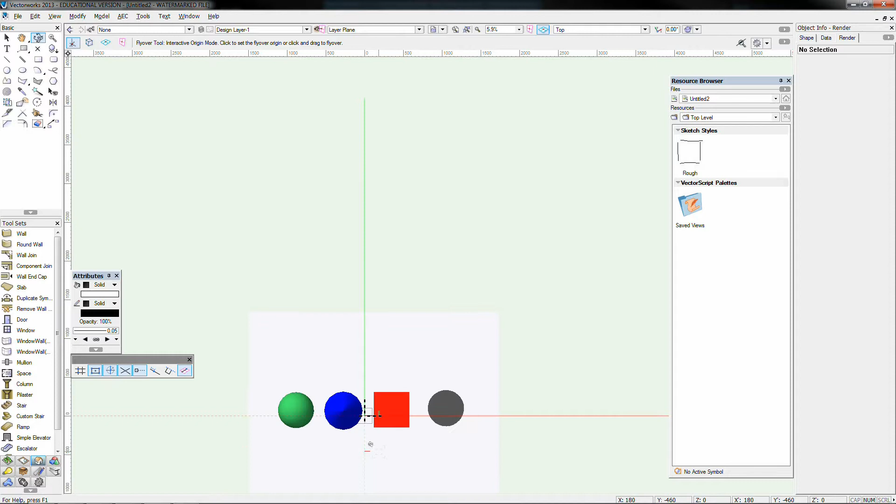But as you can see here, I can fully move around these objects in 3D, no worries, and jumping between views as well. So I'm going to jump back here to my saved view that I've made. We're going to talk about those in a moment when we talk about taking snapshots.

So jumping back down here from the view menu, rendering, and I'm just going to open the OpenGL options here to show you can increase the detail, you can use textures, edges, shadows, all of that. So just have a play with those tick boxes there if you are requiring something for a presentation mode using OpenGL.

Now, that there is the cutoff point down to here where the basic package of Vectorworks stops. So normally in basic Vectorworks you'll have your wireframe. I don't know if you have Sketch, I'm pretty sure you do. You'll have OpenGL, and then it'll jump over this section here. You'll get to your hidden line and dashed line, I believe, and then your polygon shadings down the bottom.

This section in the middle, though, comes with the Renderworks package. So that's the new 4D Renderworks package that's included with 2013 if you want it to be. In 2011 and I think 2012 you're still using the old one, which is my preference, strangely enough, but we're going to go ahead with this one here.

So Fast Renderworks is kind of a nicer looking version of the OpenGL, and then you can step it up another space right here to go to the final quality mode, which makes everything look very slick. You will have shadows if you have lighting incorporated, but you can just have a look, for example, on this sphere, how nice the edges are, how smooth it is. You can see as I zoom in it has to increase the quality for the DPI of my page, but you can just see it's got some really nice effects happening on there.

The cone not so much, but the reasoning for that is the way that this is currently drawn and the amount of divisions that it's got going on there. So I'm going to zoom back out again as my computer thinks about doing that. There we go, back out here to my saved view.

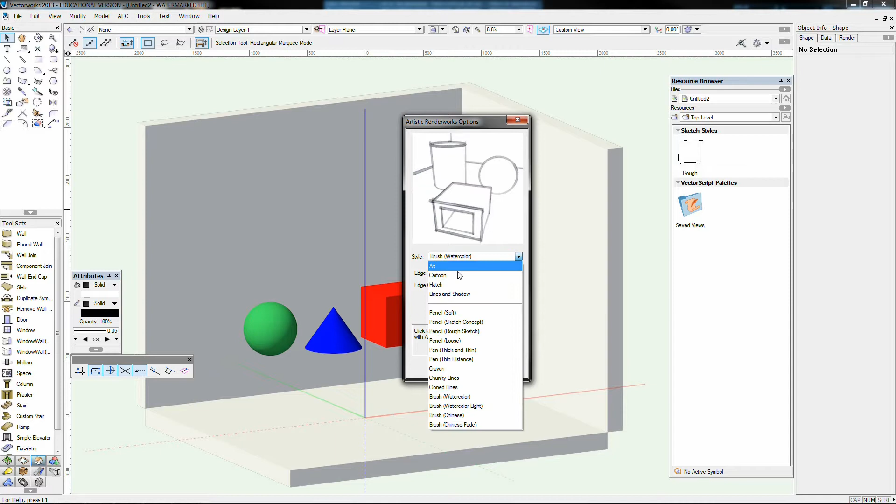These artistic Renderworks options mainly affect your pen styling and the edges of objects. There are a few that affect the actual surface and textures as well. I think Cartoon incorporates textures and makes them look slightly different. So we're going to try out, let's start off with Cartoon.

That looks pretty good, just as a couple of examples, obviously you can play with these in your own time. It'll take a moment to re-render once I've selected that from the rendering menu up here. So, no, sorry, not custom.

On to the next one, Artistic Renderworks. Here we go. Now what you can see here is that it's actually converted my drawing into its interpretation of a cartoon, which is kind of nice, pale colours, no shading, the walls have been simplified, it's dropped a few lines where it thought was necessary, and it actually looks really good.

So when you start to develop your skills in Vectorworks, you'll know when it's appropriate to use these and when it's not. For example, for some of the technical drawings I do, I just use the pencil soft and the pen thick and thin to really represent my objects as though they've been freehand drawn. And when you print it out on an A4 page, people can sometimes sit there and go, did you actually draw this, or is it printed out?

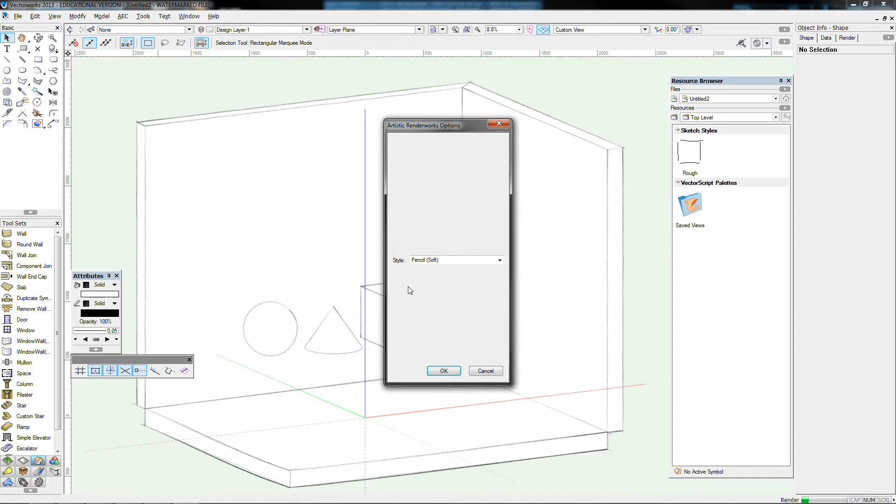You'll notice things like it enhances the end lines of stuff, as if you've drawn slight overshoot or extension lines on bits and pieces. The lines are slightly wobbly, all that kind of stuff going on. And inside these options for these various styles, you'll get a variance of change as well, so for example a thickness and an edge color. There's also a few that have more variation than that.

So here's the pen thick and thin. You can see once again, it's as though I've sketched it with a pen. It's actually adapting here, it's got thick and thin pen styles going on. Hasn't fully rendered because I accidentally stopped that, but that's okay. You do get the idea, hopefully, from that where you can head.

I recommend that once you've mastered your Vectorworks skills up until this point, you've got something that's presentable, and you want to present it in a different way than standard, have a look at the Artistic Renderworks options in there.

Hidden line and dashed line. Now these are probably my most commonly used, in particular when I'm doing detailed drawings of set items, for example cutaways of different pieces of set that I really want to show the framework or the details behind.

So hidden line, and you'll notice I'll click it here. It's very straightforward. It will simply show the lines of anything that's at the forward of the image that you'd normally see, and it won't show the back lines. So for example this box here we know has a line that runs down here, and we know it has two extension lines that run out this way. If I click on it, you'll see those hidden away there.

So hidden line basically sketches it in a style that just simply represents the wireframe view without the background drawing technique going on. Just as an example, this is the standard hidden view here, and this is the wireframe, so it's just hiding all of this excess stuff hidden behind.

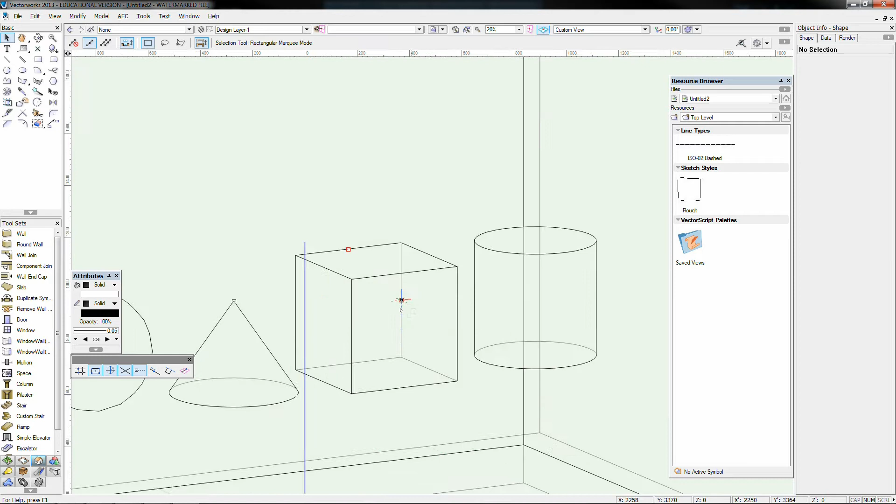Now there is another one here, and this is another one of my favorites, which is the dashed hidden line option. What this does is it applies the same hidden line technique to everything shown in front of you, but on a better shown scale than this. All of the other lines have dashes through them. You can see it here as I zoom out.

This is more evident when you actually take this across into a viewport, as you're meant to do, and then put it onto a sheet layer. So that's what that is for, and we'll try and do an example of that later on when I do a cutaway into my friend's household.

Jumping back down here to the rendering menu, we've got the shaded options now for polygons. So we've got unshaded polygon, shaded no lines polygon, and final shaded polygon, and they're all very straightforward. Their title kind of tells you what they are.

So unshaded polygon renders these in 3D, but doesn't give any shading to the polygon, just shows them as they are straight out with their mapping. You can see here it's given this a planar mapping on top of here.

With the surface represented as a polygon map, moving straight ahead. Shaded polygon takes this a step further, keeping that same mapping but giving it a slight shading, as if there was some sort of omni light directed upon this.

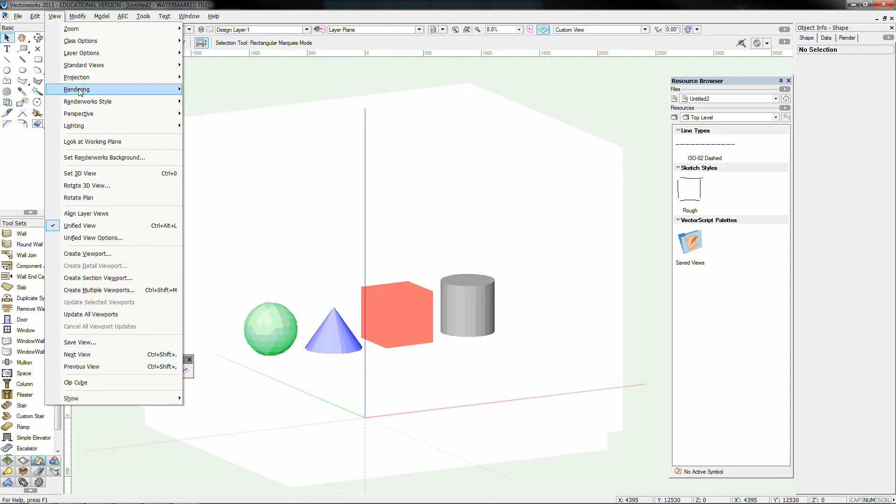As you'd guess from the rendering menu, shaded polygon no lines takes away those lines, just giving it out as a polygon map with the shading options present. Rendering again, final shaded polygon is a step up from there, giving it enhancement with lines, slightly upping the textures and rendering capabilities, but we're still seeing it as a polygon breakdown.

The difference with this over some of the other rendering modes is it will be quicker because it's rendering as polygons, a simpler form of each object, but you won't get the smoothness, so it's something you have to toss up between. It's a personal choice in how you want to represent your objects.

Down the bottom, you've got batch render jobs and starting your renders. We'll get into this particularly when we talk about doing multiple different styles and big batch jobs with your final quality Renderworks, and it's where this saved view option comes into play.

Up here from this little tiny box, it's got saved views. It's got a drop down menu, and normally it'll just have these two, save view and edit view, and then it'll have your views listed underneath. I've got 'untitled view,' which is probably a mistake by me.

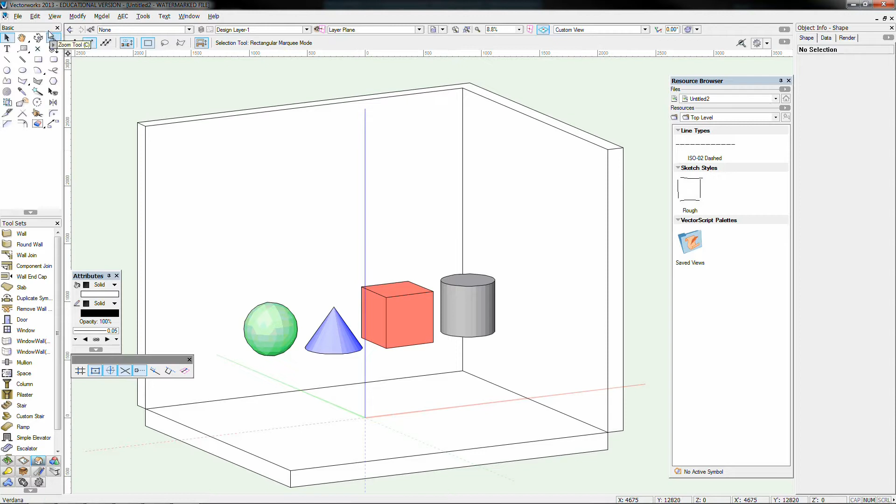What I'm going to do is change this up a bit. I'll go to rendering and make this final quality Renderworks. There we go, and I'm going to rotate this to a top-down kind of view in isometric mode still, and show you the save view. I like this view, that's a great view. Click save view, and you get some options here, so I'm going to call this 'top down isometric.'

You get some options here: do you want to save the orientation, the zoom, the page location, the unified view - meaning do you want all layers unified in the same location, or split out separately - and your render mode and options.

In this case I'm going to tick this box, which means that when I come back to this view I want it to render out in the style I currently have selected. Do you want to save the visibility? Most probably you do - you can alter the layer options. And do you want to save the class visibility, meaning do you want everything you're seeing now to stay the same? If you've got all these checkboxes done, it's going to be the same when I come back to it.

So I'm going to hit OK on that. I'm also going to rotate back down to a slightly underneath view, and change the rendering style - I might make this our artistic Renderworks, a sketch style of some variety. I'm going to save that view as well, calling it 'lower isometric (sketch),' and save all these things again.

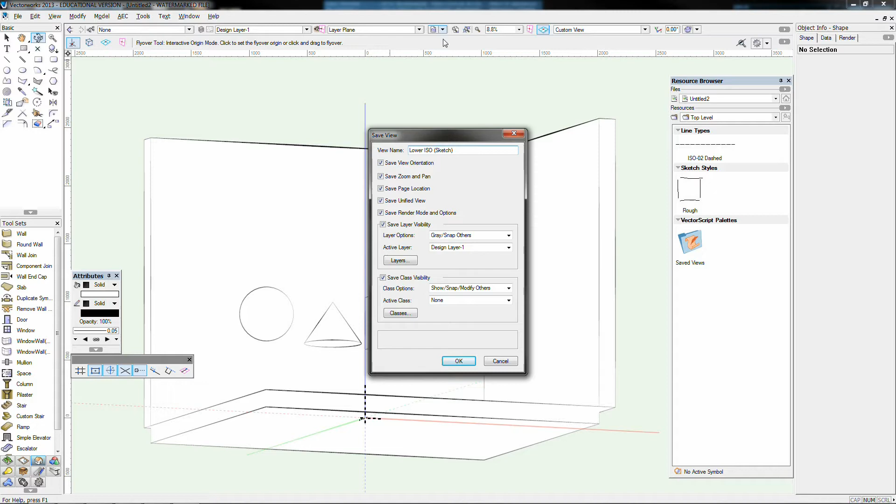Now what this allows you to do is, if you move around your drawing and go 'oh yeah, I need to look at that from a different view,' and then suddenly think 'oh, I really liked the perspective I had and I can't get back to it' - all you do is drop this down here, select my lower ISO sketch, and it takes you back to seeing that as you wanted it, and you can drop this down again.

I think that top down view is really good, and there it is again. So it's a really good way if you've got a client in front of you, and you go 'now these are some examples of what you might see around the site, this is what you might see inside your building, this is the view from the bathroom, the kitchen, etc' - and set up a whole heap of these things. You can not only get them there, but print them out from the view up here.

From my rendering menu here, I'm going to go down and create a batch render job. Now what this does, and it's really for if you're doing high resolution images that are going to take a couple of hours to render out, for example.

Some people get up to that stage. For example, the Shrek movies, this is a bit of trivia for you, but the Shrek movies actually took 2.5 years to render. They literally sat back and went, cool guys, see you in 2.5 years, just let this computer do its job.

So when you get up to these stages, I've had high resolution images that I've done that take 15-20 minutes just to render a single final quality view.

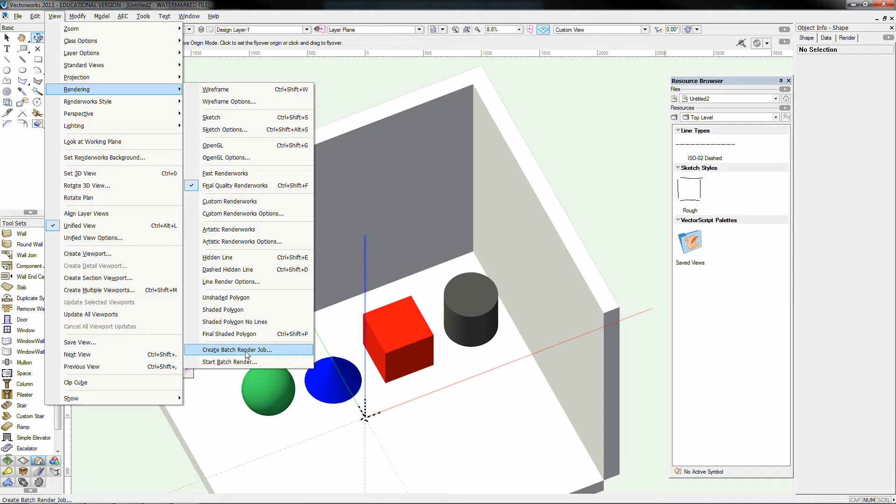So what you do instead is you go to a view, and I'm going to do it here, for example, in wireframe. This could be a whole series of views that you've got from your saved views. I'll go to this one here, and you go, okay, I want this rendered out. Rendering, create batch render job. It asks what you want to call this. I've already got one saved, but I'm going to call this ISO-01.

Super. And it asks what the render mode is, and you go, well, I'd like it to be either a Renderworks style of all these different styles, which we haven't got to yet, but we will. You've also got your final quality, your custom Renderworks, and your artistic Renderworks. So I go, okay, I'd like final quality Renderworks, please.

It goes and sets the export image options, because it's eventually going to become an image. You say, I want all visible objects, or I want the current view, so I want current view, for example, what I'm seeing right now.

The memory required for this is greater than 500 meg because it's quite an advanced thing. Do you want to proceed? Yes. Is that because it's such a large file? Wow, that's massive. That is massive.

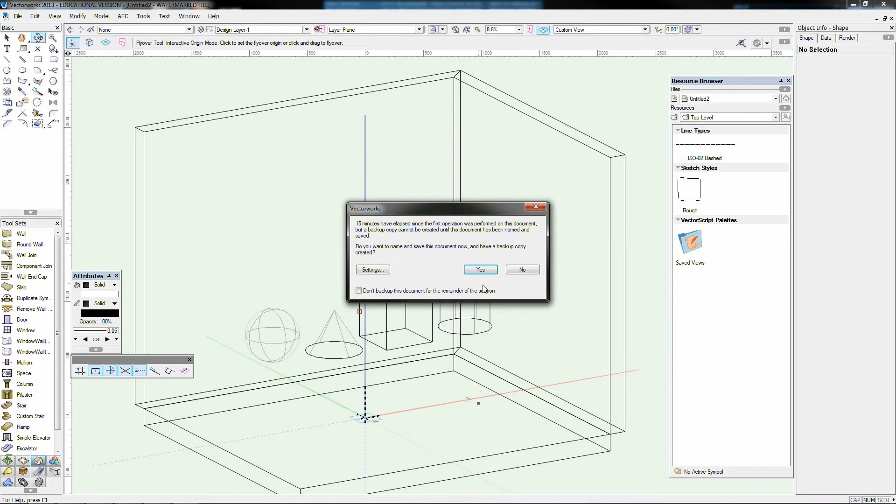I'm going to swap that down. Let's do a 1920. Oh, close enough to 1080, whatever. So I'm going to click save on that one, and then hit OK. It gives me a message saying I've been 15 minutes or more doing this, so that's fine.

So what you do then, when you want to start your render, is you go down to rendering, you go start batch render job, which I've misclicked there, and you've got your available jobs sitting here. It's like keeping a queue in mind, and you can choose all of the chosen jobs. You choose a folder to put it in, so it can put it under my name, or I can choose a different folder, and you click start.

What it will do is then just think about it, and do it in the background. While it's working away, you can go check your email, go make a coffee, go have a snooze for a couple of hours, and come back, and all of your particular jobs that you've chosen to be done will be finished.

That's what that's for, and once again the easiest thing to do is just jump around in your saved views there: create batch, create batch, create batch. Once you've got a whole series of stills that you're happy with, you set it to go overnight, come back in the morning and surprise, you've got all your drawings done. So that's the rendering stuff going on there.

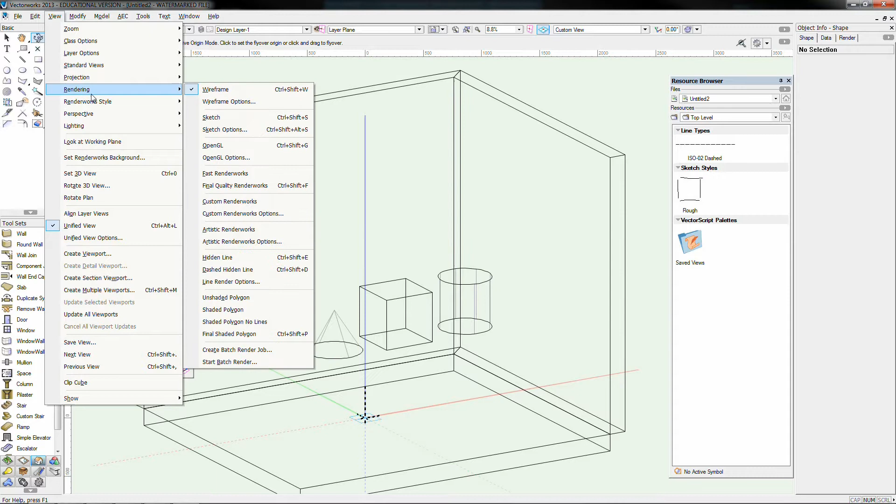We have got the Renderworks styles, and they're very much just like these rendering options here, except styles come with a slightly different tint to them. For example, they're mainly artistic. You have got realistic down here as well, which you get into once you put a skyline in, and once you've done your lighting options. Once you've put all your textures on, you can do all of these.

So I'm just going to have a go here. I haven't particularly played with these much, but the artistic shadow blue, that sounds pretty interesting. That's very pretty. Look at that. That's excellent.

And we've also got, where are we? Yeah, we'll try one of the OzCAD ones, which come with my Australian version, I believe. If OzCAD want to correct me on that, I don't think they're international, but we'll try Sun Study with grey shadows.

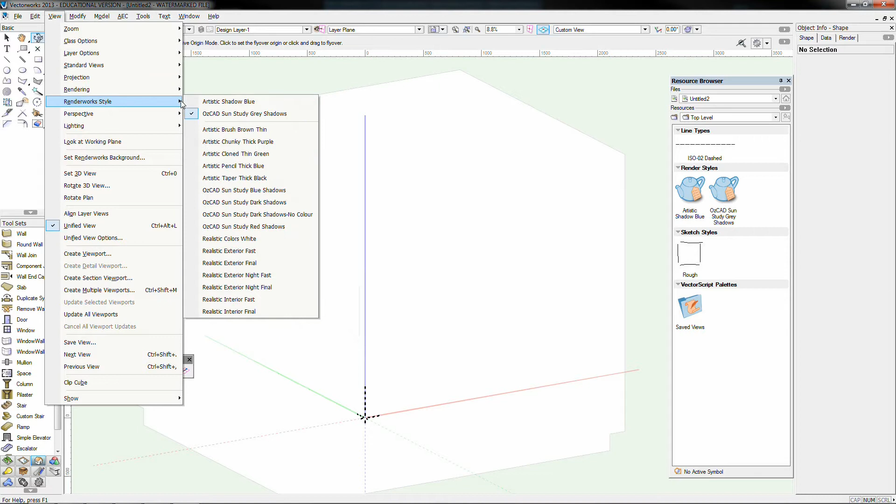Completely obliterates my object because it's not sealed inside. I presume if you were doing an interior drawing, that would be slightly more interesting. And we'll just try one more here from the lower realistic side, we'll try an interior fast on that.

And there we go, it's having a go at doing that. You can see that's the new 4D render engine going there, and that's what we've ended up with. I'm not sure why my walls are white. It looks like it's done a physical sky interior background, because it's not sealed as an interior, it's taken most of the blue surrounding this object. As you can see, I've got a sky rendering in the background, and it's putting that onto our objects.

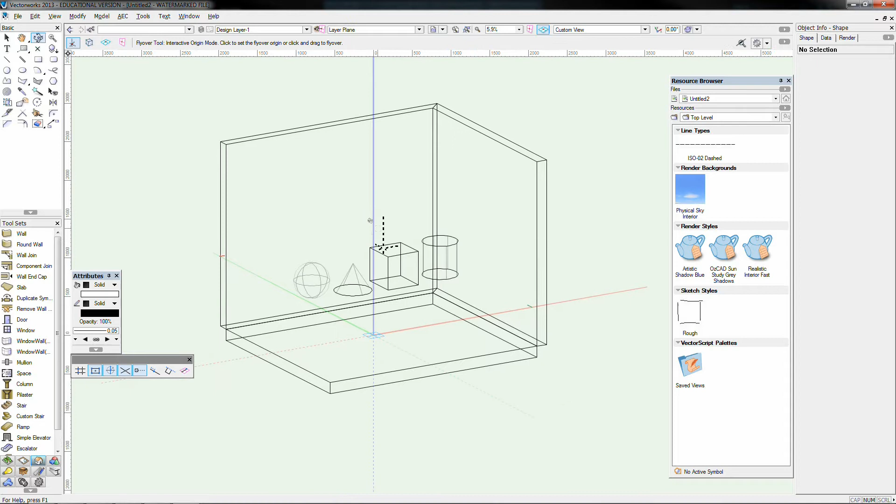But we'll get into a lot more of that later on when we have a look at our apartment. So, where do we move from here? Very good question. Jumping back into a wireframe so my entire drawing isn't taken up in rendering power, and we're going to talk about textures.

From over here in my resource browser, if you don't have it open yet, from the windows up here you can choose palettes and resource browser. Click that, you've got a checkbox, and you'll have this little thing. Sometimes it sits collapsed - there it is - and then you can just click this little pin, it'll pop back out and stay in place. We've got quite a few things that have popped into here as we've been doing our different render styles, just in case we want to drop them on, but I don't want to.

What I want to do is right click in this and go new resource in Untitled 2, which is my current document name - great name for this document - and you'll see there's a couple options here. I want a Renderworks texture.

Notably here, this is the point - if you don't have Renderworks, you kind of have to stop, because you can't do any more than this. You can play with your colours, you can do your sketch options, you can have a play with that. Don't stop watching the episode, obviously, it's quite interesting from here on in, but most of your rendering capabilities won't be there, just throwing that out there.

So, Renderworks texture, click on this, and here we go. We've got a couple of options: a texture name, and some shader options. They come in 4 categories: colour, reflectivity, transparency, and bump. Let's run through what each of those mean.

So name - what am I going to call this? I'm going to call this test 01. Sounds like a great name to me. So colour - colour is the base modifier. Colour is basically what does it look like underneath everything else. If you strip it back to its bare bones, what does it look like? And you've got some options under here.

You can take an image. Now, image means I'm going to take something and tessellate it. This is good for wood floorings, it's good for tiles, it's good for if you want to map a wallpaper to a wall - that's what you want to do. Something that looks like something in the physical real world that you're going to map to this thing. And that's probably, at a guess, 50% of most of your textures. The other common option, and that's normally if you're going to do a high resolution, of course you're going to take mostly real world images.

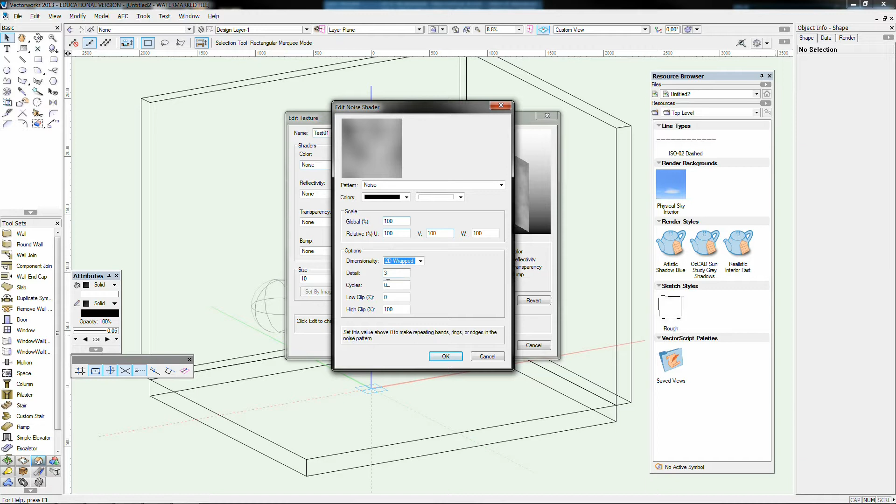Cool. Anyway, back on our standard noise, variance between colours, some scaling options, relative mapping in 3 directions there, and dimensionality, 2D and 3D solid. Choose whether it's wrapped like a pattern or a 3D solid. Interesting, and some different options here that I've never played with, but you can go and have a play with those if you like.

Pavement, once again, here we go. If you're doing an outside exterior view of some sort, you're probably going to need pavement tiling at some point in time. It is a random pattern scaling there. You've got the stone colour, the gap colour, and the smudge colour, which I believe is the smudge across some of these. Hit OK on that.

And we've got tiling as well, which is a more symmetrical pattern, much like the brickwork. It's normally 2 or 3 tone. You've got some different patterns here, so we've got brick patterning, circular patterning, radial lines, for example, if you want to trip out and have a dance party. We've got some spiraling, and everything else is here, there's a lot of different patterns.

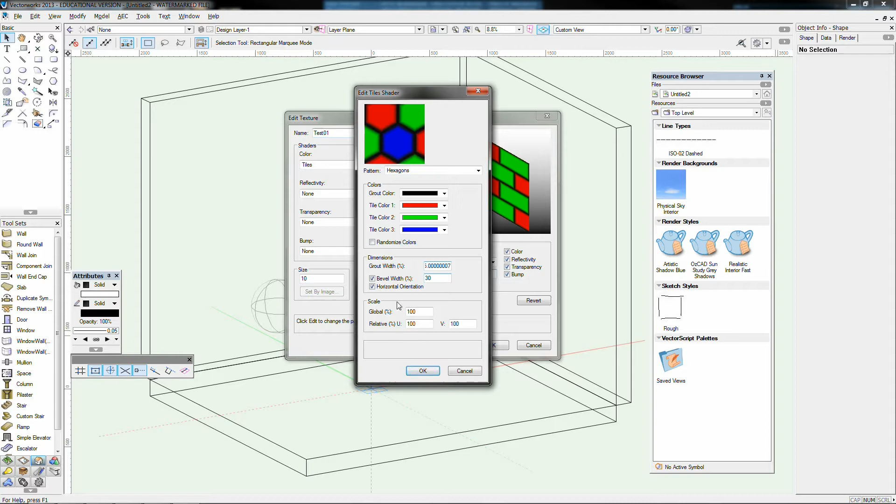Weaving, for example, if you want to do any kind of weave patterns on a wall, or create a very basic wallpaper, you could probably do it here with some tessellating objects. You can see we've got some different colours here. You can randomise the colours if you want to, which is probably a variance between your 3 colours, using those as a boundary. Then you've got some grouting options, which is the area around your patterns, some beveling and scaling. It's all pretty straightforward there. Hit OK, yeah, looks kind of cool.

Jumping down, we've got reflectivity options, and I'm just going to choose a base color for this next section, and we might come back and have a look at something else. So I'll go back to my red here. Reflectivity is how much light bounces off something.

There's a few different levels. You've got your basic flat wall that absorbs most of your color, which is kind of like a black hole for any light. Then you've got your next level up, which is kind of your plastics, I guess. Plastics jump in and out, but the very basic plastic level won't have much reflection, but it will be reflective. And then you've got your metals and, of course, your mirror all the way up the top.

You can have an image reflectivity, which means it only reflects in certain parts of an image map that you go through. We'll probably talk about that more in transparency later on. You've got backlit, which means it's actually producing its own light, so it's shining, and you have got a percentage, a brightness level.

Reflection and blurriness, that's how much of the image comes out. So if you've got a mirrored surface, for example, your reflection value would probably be close to 100%. And depending on how good quality your mirror is, the blurriness would be how well that image is translated back at you. At the moment, the luminosity, the brightness is at 100%, it renders out at 100% no matter what.

So if this was a very dark scene, it would be actually producing its own light to 100%. No reflection means it's not bouncing any light back at us, and there's no blurriness of that light being bounced back. Keep going down though, you'll get to glass, which you can see has gone slightly opaque there.

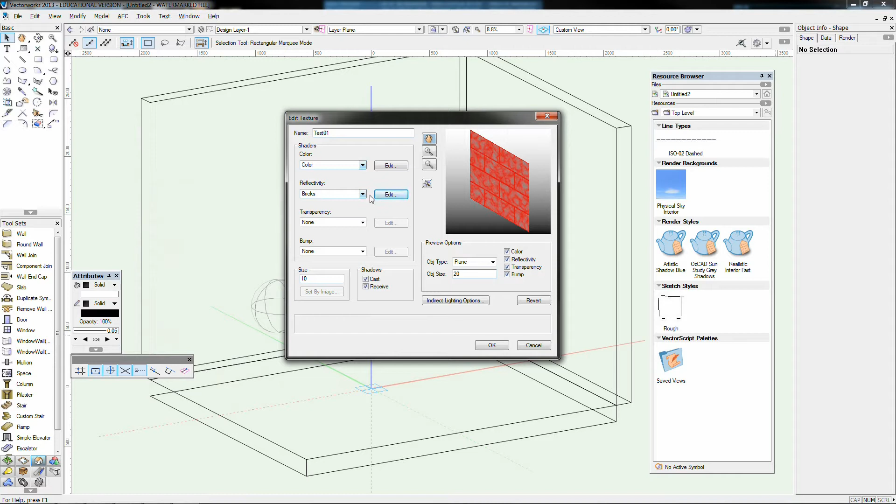And you've got a blurriness factor over the top there. That's the added column that's been thrown in the top there. That's the best way to represent that in my opinion. I'm going to throw that back just to a plastic reflection value, and I'm going to go to transparency.

So transparency, you've got a lot of different options here. We've got image and image masking. Now I'm not actually sure what the difference would be here.

I think an image mask must be on a grayscale variance, and then the image must be on a different variance value, but I'll have to have a look at that. We'll talk about that more though. I'm not going to touch image masking now - we'll talk about it when we do image props, which are more exciting later on.

You've got 4 different standard options here: color transparency, glass, plain, and rectangular mask. Color, I'm not exactly sure - it must be some sort of adjustment due to color. I never use that. I always use glass or plain transparency options.

So glass, here you go. You can see it's kept our slightly opaque red tint here, the transmission rate of 95%, which means that 95% of light passes through this, 5% is maintained within our glass. So the higher this rate is, the more light can pass through it. If I put this at 50%, I'd expect 50% of light to hit and refract internally inside this glass shader, and then 50% to pass through. That should make this darker if I hit OK.

Yeah, there we go. You can see 50% of our light is getting caught up inside our glass. So for example, if you had sanded perspex, depending on the level of sanding, more light is going to get caught up inside that object and illuminate it rather than passing through.

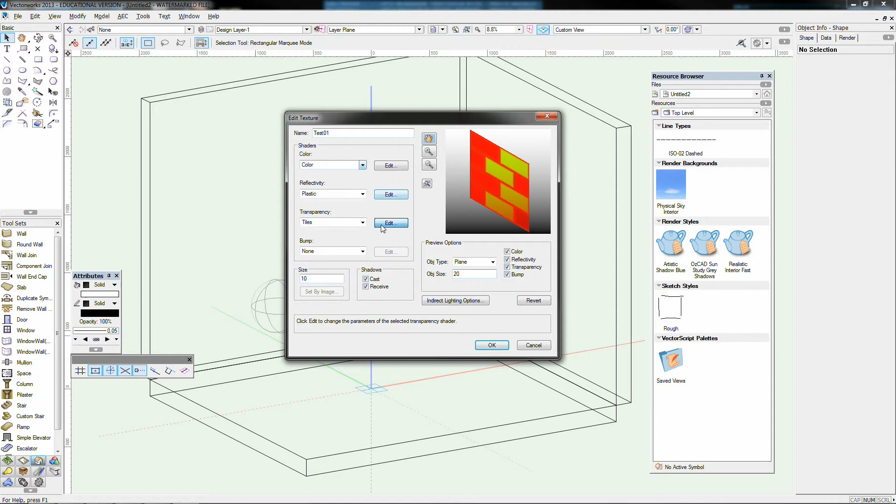Sometimes you can use the noise modifier or the tiles option here on a weave mode. And if I make all of these white, even though it doesn't show it there, it shows it with the white to black gradient in the background and then the grout color in the middle. If I hit OK, you'll see it ends up like this.

What I've got there is the grout in red, which is our base color, and the transparency weave in the middle. You could obviously reverse that by making the grout color white and black as the color you want to pick up, and you'll end up with a weave much like a cloth, and you could shrink that down to a smaller scale. There are easier ways to do that, but that's a good starting point for anyone looking into transparency. I'm going to put that back to none, and look at bump mapping now.

So what is bump? Bump is something that was developed during the early rendering of movies, and it's essentially what bump textures are - if you have a flat surface, it will identify that as a flat surface when you're using it, when you're hovering around it in wireframe, when you're looking at it in basic views.

The moment you go to do a full scale render, it does a thing called bumping, which is where it embosses a 3D texture into or out of the actual surface itself. It's only got a couple of options: image, which means you're doing an image bump, or the brick, noise, pavement and tiles options.

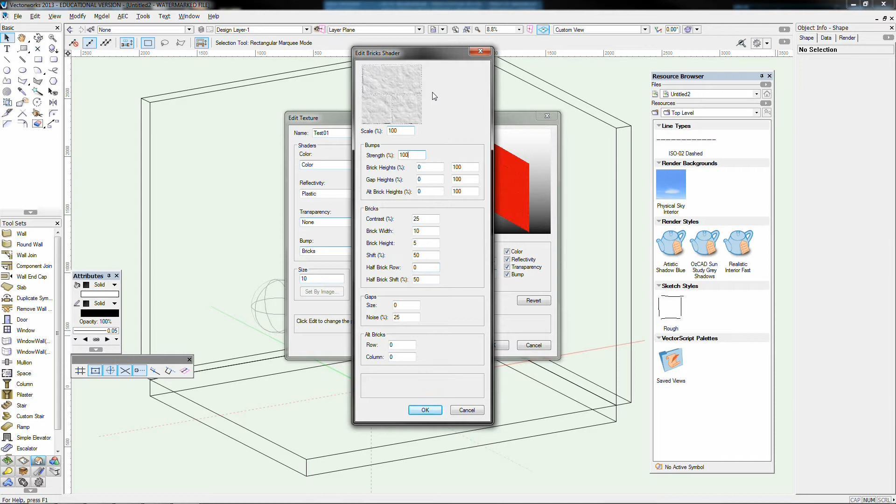I'm just going to click brick and show you what happens here. You'll notice there's a brick formation that looks like it's been embossed into the tile itself. I'll see if I can increase the strength here to 100%. There we go. If you look at this brick shader, it's actually using a black and white grayscale image, and the blacker an area is, the more indented it is into the tile itself. The whiter the area, the further out it comes from it.

You can see there's various modifiers here, same as our brick stuff, but when I click OK, this has quite a lot of detail. If we were to look at this tile side on, you'd see bits protruding out and bits going back inside. Now that's bump mapping for you.

Once you add that together with the brick color as well, if we were to have that on, say, a red brick with a black tile color and all that kind of stuff, and put a basic reflectivity on that, no transparency, what you'll end up with is quite a detailed series of bump maps.

What you can do with this also is use it in, for example, wood textures. If you're doing a wood flooring that's a floating floor, you've imported your texture in, which we're going to go through and do together - import a wood texture and see how that looks. With a floating floor, there's always going to be a gap between each of your floating floor pieces. You could use a bump map instead of having to draw every single one of those lines in between your wooden floorings. You could use bump mapping on a black and white image bump you've made to give the impression those little lines in between each one are there, for that added bit of detail.

And one day, perhaps, if you go into interior design, if you head down some sort of architectural route and you really need to do those high resolution images, you will need this kind of level of detail to give you that edge on your competition.

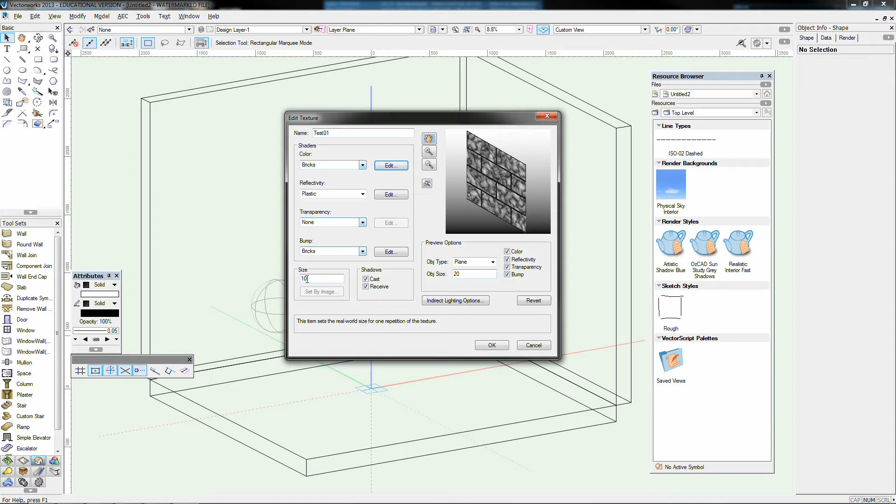We've got an object type here for our preview, so I could put this on spherical and you could see some spherical options there. You can see our slight reflectivity of plastic highlighted there, and if I took this back to an object attribute here, you'd see that bump mapping shown over that sphere there. There's a couple others - there's the cube as well, there it is, and there's a flat object which is a base flat on, as if we were hard up against the surface itself.

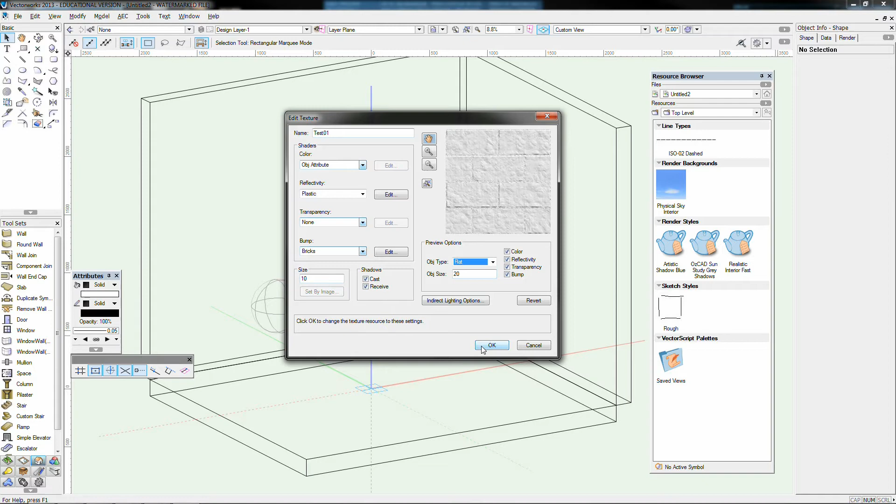Couple of checkboxes and some indirect lighting options as well - can it cast and receive shadows? Yes, yes, yes. And then you hit OK when you're happy. What it will do, and I'm going to click no on saving that, is it'll add it to this section here, render textures, and you can see I've got test 01 written here.

So I'm going to apply this texture that we've just made, the testing one, to one of our drawings. I'm going to pop this into Final Quality Renderworks, using the shortcut key there, Control Shift F for me - I think it's Apple Shift F for you guys on a Macintosh. And I'm going to apply this to our cube. There's a couple of ways to do it - I'm going to use a click and drag for this one, click and drag onto that object there.

And you can see it's applied it to there. So it's kept our class object styling and put that on there. It's at a very small scale, I think. Am I zooming in far enough? Yes, I am. So either a very small scale or a very large scale.

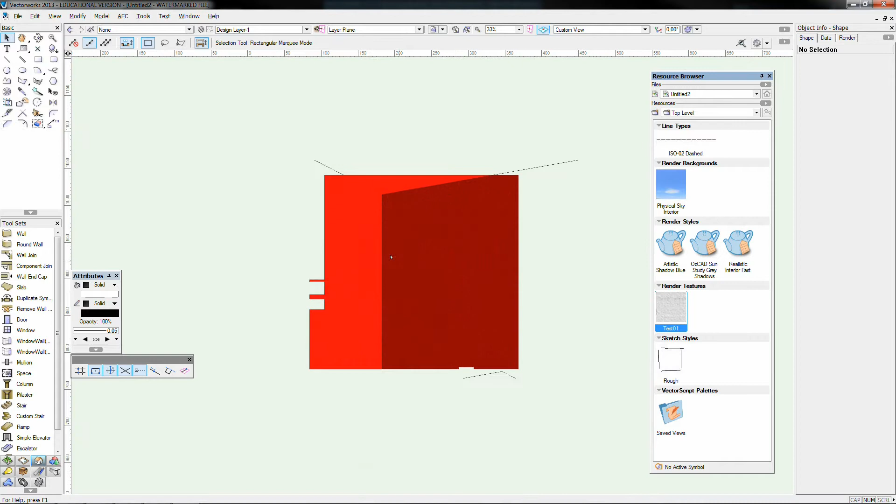Let's have a look at that back out here in the real world as my computer loads that in. I'm going to go across to my render tab now. I have no object selected, but the moment I have this cube selected, you can see it's given us some information. It says this is our texture that we've currently got selected, test 01.

Working our way from the top, we've got our document sketching style, which is only relevant if you have a sketching style on. Then the part, which is overall - that means we're doing the overall of the object. There are a couple of other options here, the top, the bottom, and the sides, and you can see at the moment they're all taking their data from overall. So if you just want to apply texture, just apply it to the part of overall.

Decals we'll come to when we get to wall and posters in a moment. We have our texture name here. We could obviously click on any one of these. For example, I'm going to try a glass clear green, and you can see it's got an amazing refractivity index going on there, showing us a few of the different objects from different sides. And then I'm going to flick back to our test 01.

What you'll notice is the moment I've taken that texture, the glass one, it's placed it into our texture library here within our document. So it's taken it out of the Vectorworks library and placed it into our library in case, hey, we liked it, we might like to go back to it.

Mapping types I'm going to show you in a second with all of these, but there's 5 different modes apparently. There's planar mode, which is basically in alignment to the plane, the ground plane. There's a spherical mode, which wraps around any spherical objects. A cylindrical mode, which is why I've got the cylinder here. And a perimeter mode, which basically chooses the perimeter of the objects and maps it out towards that. I'm going to leave it on perimeter as it's probably the best for this.

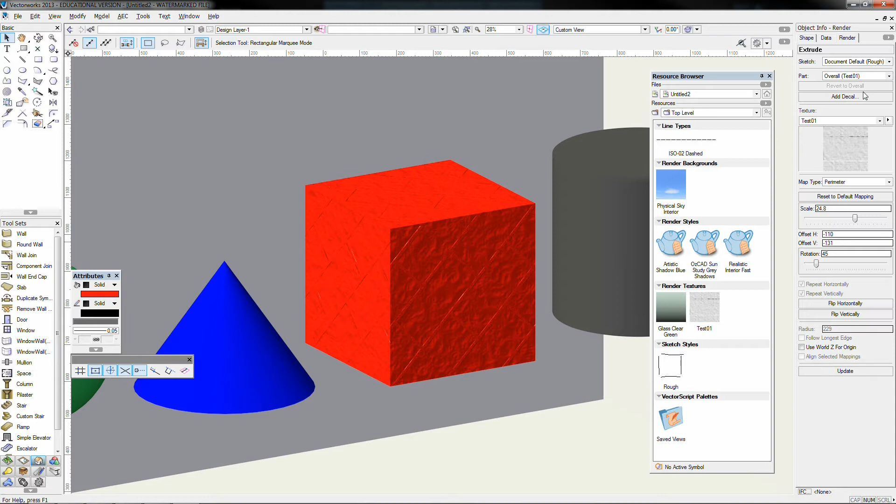So, what does all this mean? I'm going to import a texture now onto all of our objects and have a look at how it maps differently. I'm going to select all 4 of our objects here, and give them the same mapping. Let's choose something like, I want probably a wood of some variety. Okay, looks like we've got this wooden styling here. Okay, that's a really good one, I like that.

So what can we see here? We've got a cherry wood glazing. And this is going to show us the different types of mapping that we've got here and how they're applicable in many different ways. I'm going to have to change the scaling on this back down to 1. Just remembered our defaults from before, and I'm going to throw that back to 0.

Most of these shapes, when you first draw them, have a default mapping style. If I click on the sphere, you'll notice the mapping type is spherical. The cone is probably the same, seeing as it's got a majority of spherical components to it. The box, I'm pretty sure, will be perimeter by default, and strangely enough, the cylinder is perimeter as well. So where are we going to go from here? I'm going to show you a couple of different variations on the mapping types and when you might try to use them.

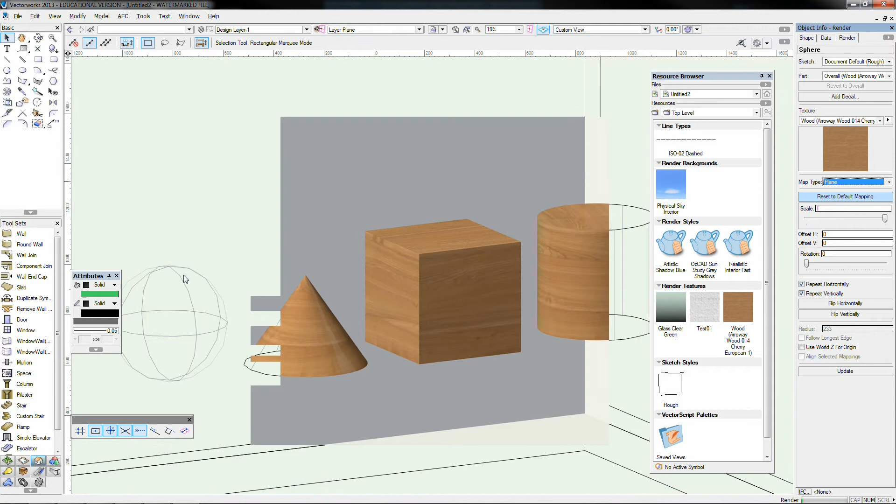The spherical mapping for these is always going to be the best, for the cone and the sphere. The only other type you'd probably ever use is planar, but the issue with planar is the alignment of the actual texture itself. If I change this to planar, I think we'll end up with a line where the seam of the texture begins, the 0 marker, and it wraps the texture around from there with a tile. The spherical mode actually combines and recreates the texture all the way around the sphere. That's why I think it's a little bit better for that.

It's important though, when you're doing spherical objects, that your texture actually tessellates correctly. Tessellate means that when you put seam to seam, you can't actually see it — it always keeps going round and round. Not as important with wooden flooring or anything like that, because hopefully you can just match up your joints. The cone is much the same.

You can still see our polygons showing through here from this cone. I think there's a way you can get rid of that by increasing the cone data, but for now I'm just going to leave that there. You could put a blur on it as well.

With boxes, you'll find that perimeter mapping is mainly the best for any type of geometry that involves straight polygons that meet at a corner — any kind of box you've created, any shape with jagged edges. The reasoning is that it won't give you tessellation between these two if we wanted an object to wrap around. It's not the best for that, but it is the best for displaying this correctly.

What you'll notice at the moment, on perimeter mapping, is that this side here looks correct. I'll try and click off that. This side here looks correct, and this side here has the same wood texture.

To show you a variation, were I to use planar mapping for this, it would choose the front plane here, and you can see it's chosen to put the joint at the 0 marker and map this area correctly. It's given us the correct sizing. But you'll notice on this left hand side and the top that when this image meets this edge, it instead tries to wrap it around in the best way it can.

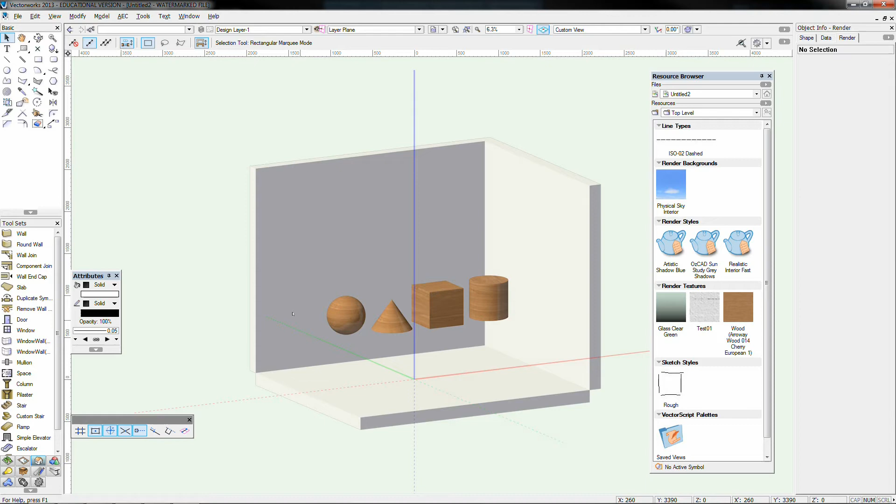And we're back here in the friend's apartment. I've just turned off the walls. I put them on a separate class for that side just so I can see this a little bit better, but I do like having the other walls present. I'm also going to turn on our slabs class because I do want to see the flooring in here. And in my layers here, I'm just going to turn off my background image. There we go. Now we can focus on this a little bit better.

You can see I've got my slabs in. I'll do a quick OpenGL so you can see where I'm at with my drawing thus far. So I've got my doors in, the big window up the back there, a door over there, the kitchen which is not complete yet, and the other door. All very basic textures there, and you can see I've done my little rendering here.

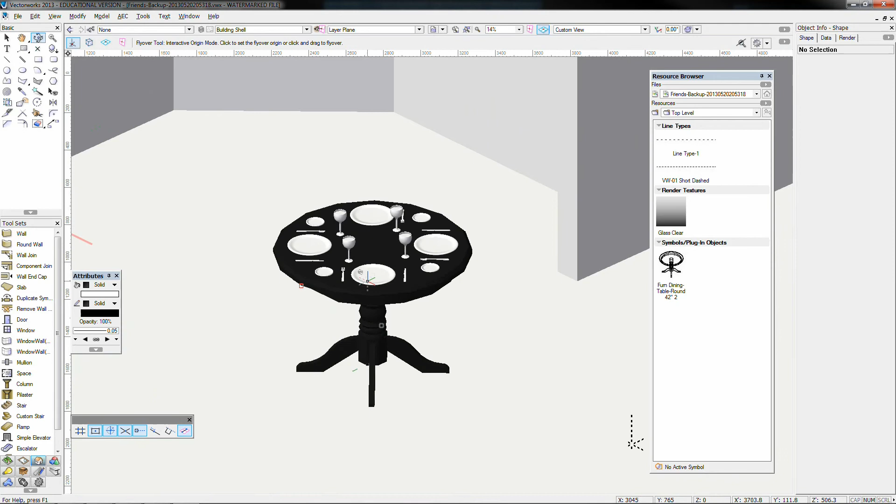You can see I've made some nice little knives and forks, done some glasses. You would have noticed in the time lapse right at the start of this episode that I put an interior to those glasses, and the reason I did that is because I want to fill them with some sort of liquid. Also got some plates and this table that I just took from our resource browser. I found that in the furniture residential section. If you're looking for that, go back and have a look when we started to use the resource browser—I think it was episode 4A, but I might be wrong.

So, first things first, this table is probably the easiest thing. I did see back here in my furniture residential that there were quite a lot of wood finishes. Each of these texture libraries, and I will show you a few more in a moment, have a lot of textures that normally go with most of the components they have. I'm just going to try a sample one of those.

Let's try this dark wood here, just clicking and dragging that onto our object here. It must be dropped on an applicable object. I see, okay—does that actually already have a texture? I bet you it does. That's very sneaky. So I suspect... oh no, I'm just on the wrong layer. It's okay, it's okay, everyone calm down.

Inside here, the rendering data for this, because it is a symbol, I would have to edit that symbol. Not a big issue—I'm going to right click and go edit 3D component. Inside here it's broken down into several pieces, and it's on a class texture of none. Okay, so what I'm going to do here, there are two options: I could either go into my classes, create a new class, table, which is probably the easiest thing, and change that, or I could select all of the objects, go to my rendering tab, and change them all that way.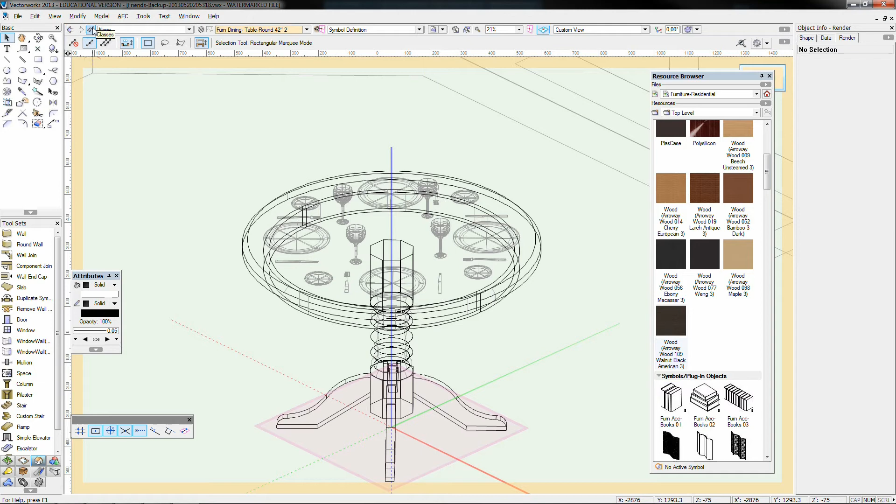I'm going to select them all, group them, and then apply the texture to the group. There we go. And now, while I'm still here under the edit symbol menu, I'm going to put that into final quality and have a look. And there we go, look at that—that's a lovely wooden table. Mapping isn't too bad on that; I think it's probably planar, but that's not a big issue. I'm going to be pretty happy with that.

So I'm going to exit that, and there it is inside my object now. The mapping down here on the legs isn't quite correct, but I'm just going to live with it for now because at this zoom level you're not going to notice. What I am focusing on is what I've got here in front of me: these plates, the silverware, and in particular the glasses that I've created.

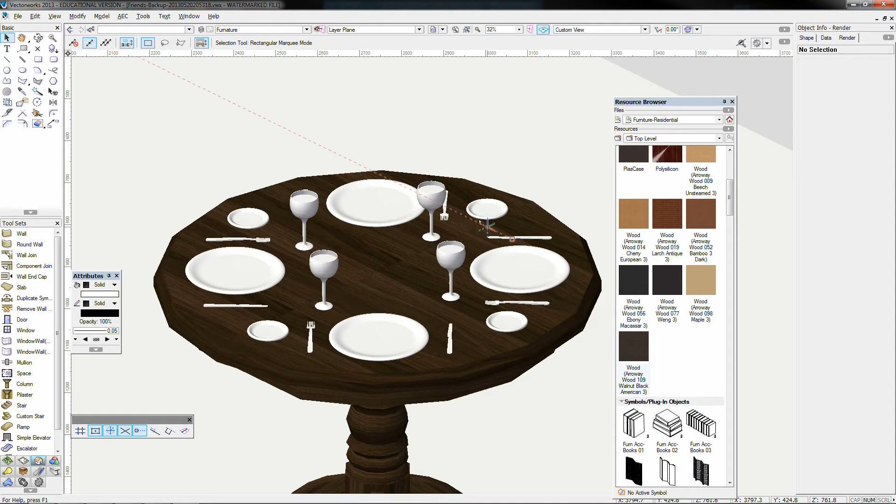What I'm going to do first is grab a knife and a fork and have a look at them, and try to find a metallic that would suit those purposefully. I don't think there's going to be one here. Maybe this metal nickel plated - if I drop that onto there, we'll have a look. It's a bit too refractive, but it's actually quite a nice texture. Do we have options for this that I can edit?

Once I've chosen one of these, let me show you the library - there is actually a Vectorworks library of textures, so you don't have to think, oh, I don't like any of the ones in the rendering options, they're all slightly lame. You can drop this down here, go to your Vectorworks libraries. You can also locate it as I normally do by going to browser document, finding it inside your program files or inside your applications if you're on a Mac. Clicking on Vectorworks libraries takes you here, inside my computer. If you double click on the textures folder, you'll find there's a few textures inside here.

I think I even get a few additional ones with my Oz texture pack, which you guys mightn't. But under my textures here, you can see there's a few. I don't know what most of them are, but there's exterior finishes, interior finishes, metals, plastic, and glass, which I'm going to look at in a second. Nature, which I presume is leaf tiling, a lot of grass textures you might use outside. Stone, brick, wood, and a lot of flooring here by a particular flooring company, I presume, called Forbo.

I'm going to have a look in metals, plastics, and glass. When I open that up and scroll down, I'll see a sample of most of these. If you're not seeing the pictures, you can right click and go view as thumbnails - if you're seeing this as a list, it's going to be a little bit boring. But you can see I've got a fair few things here: glass with ripples in it, rose tinted glass, stained glass - that looks gorgeous.

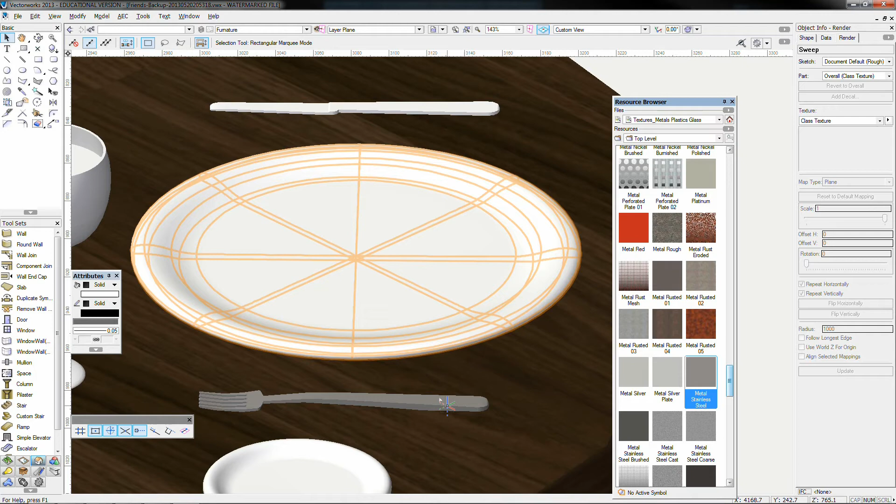I don't want any of these. I probably just want a silver plate of some sort, or a stainless steel. Let's have a look at one of those - it's probably going to be the closest that we want. We could go for a larger reflectivity index if we wanted, and I think we can do that by left clicking here, going across, and going edit stainless steel resource. That's what you can do. You can also duplicate and edit, which means you'll get a new version of it if you're currently using it on something and don't want to change that, and you can change the color and the mirror shaders as well.

So I'm not going to duplicate it - I'm actually going to edit the straight out resource, which has been duplicated, you'll notice, into my document, which is the friends backup here that I'm using. It's been duplicated into here, so I can now edit that straight out. Having a look here, it's got a color value, which I'm presuming is going to be a dark gray of some variety. It's got a reflectivity of mirror, and you can see here its reflectivity value - it's 50. That's okay. It's got a transparency value of none and a bump mapping of none.

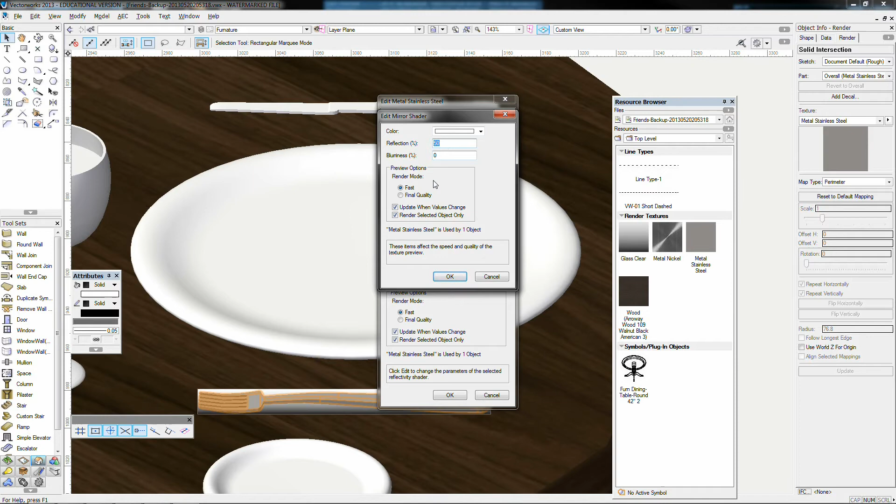Now I'm just going to have a look here. I might give that a slightly higher reflectivity value, about 60%, but I suspect it's because we don't have much lighting in here that it's giving us that kind of value. You can see the reflectivity happening here, so I'm going to give that a go and put that on all of my objects. What I did want to look at though was my glasses here.

I'm just going to do one so you can see the difference between these. I'm going to find a nice glass texture in here. I'm going to jump back into that lovely document that I had down here, textures, metals, plastics and glass, and find a glass that's appropriate to this.

We will choose glass, lime and soda - but I'm just realizing this is a group over there in the top right hand corner, so I'm going to quickly ungroup that. There we go, two components now. So I'm going to choose my glass, lime and soda here and apply that in. Have a look at that.

It's quite transparent, I'm noticing. So instead I'm going to edit that now, edit the glass, lime and soda resource. Comes out like this, and it does look quite beautiful there by itself with no other objects on it. I'm just going to change the transparency value, bring that down to about 75, I think. 1.5 is the refractive index for glass itself.

And there's no absorption color here. I could set an index color coming through there as well. I think I might instead just change this to a slightly off grey, maybe in the direction of green perhaps. No, too much, back away. It'll be fine. So there's our glass.

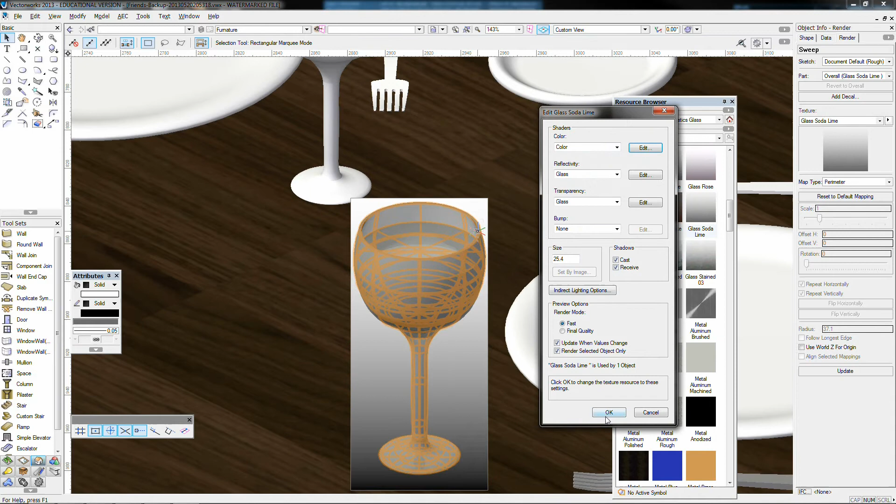I'm also going to do the interior component of this, which I haven't done anything to yet. I'll just see if there's a base color here that I like. That metal red's awesome, I'm going to... oh, even that rusted metal.

Now see, this is where you kind of mix things up a bit. You go, why are you using rusted metal? And I go, because the look of it - the look is what we're going for. Rusted metal there looks incredibly like some sort of liquid in this fashion here, particularly with that mapping style that it's got at the moment, which is perimeter mapping.

I should probably change that just because of this sweep - as you can see, it all bleeds towards the center because of all these polygons that it's created. And that could be where you could try a spherical mapping or something like that. I could try a spherical here and see what happens. Wow, look at that, that really looks funky now.

Yeah, so I'm going to leave that like that. That looks pretty good, zoom out here and have a look. I'm not quite happy with the bleed around the sides, but that's from the plates in terms of refraction happening off that. We'll see, and I might have to turn that index down a bit.

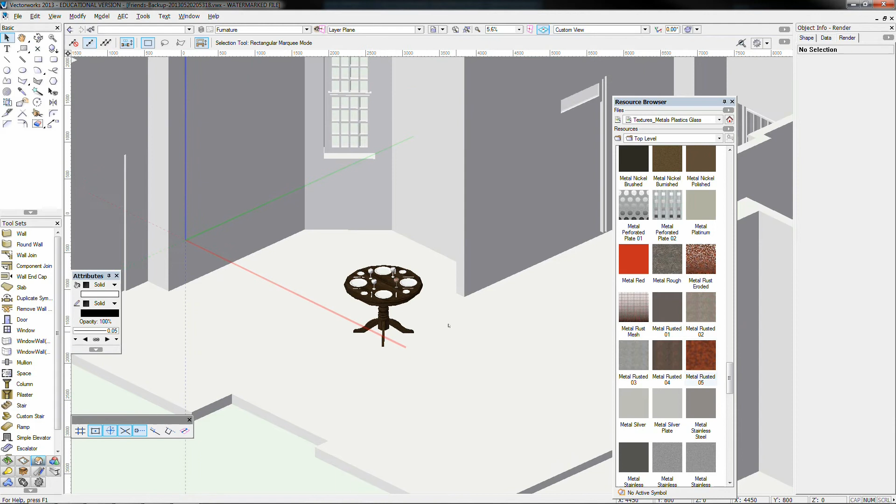Okay, so I've started off those. I'll complete the rest of those when I can get through to the rest of this time lapse that I'm doing now. What I want to focus on is doing some wallpaper, some flooring additions, and maybe putting some decals in. So I'll be back in a sec. I'm just going to get that prepared.

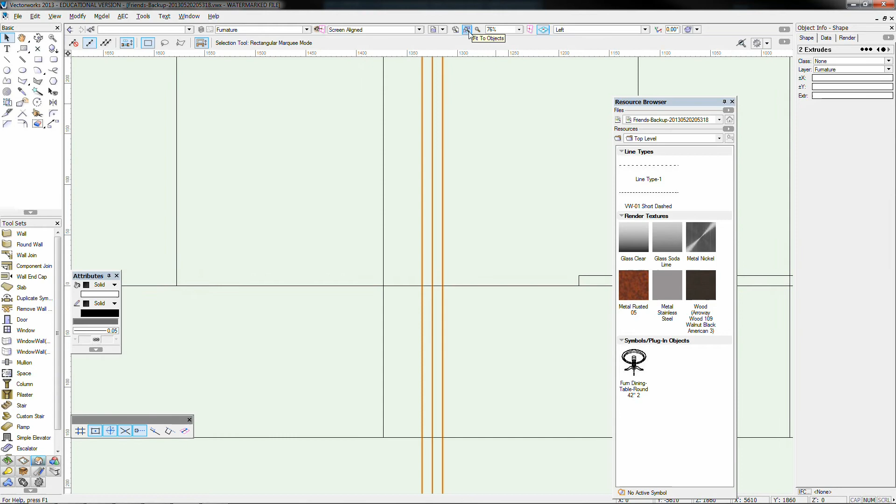Okay, so I just quickly put in a rug that I'm going to do and a picture frame that I know doesn't exist there - I'm just going to use it for this example and then probably either move it or delete it. So we're going to try out 3 different things now: we're going to try to do a rug texture on this rug that I've put here, we're going to try and do some laminate flooring on this slab down below, and we're going to try and do this picture frame that I've got sitting right here.

So firstly, let's start with the slab. I'm going back to my building shell layer that I've got going on here. I'm going to just select this slab for starters, and I'm going to pop it into OpenGL so we have a look - that's the slab selection there, and I'm also going to put it into Fast Renderworks now, which I don't know the shortcut key for because there isn't one at the moment. But there's our Fast Renderworks.

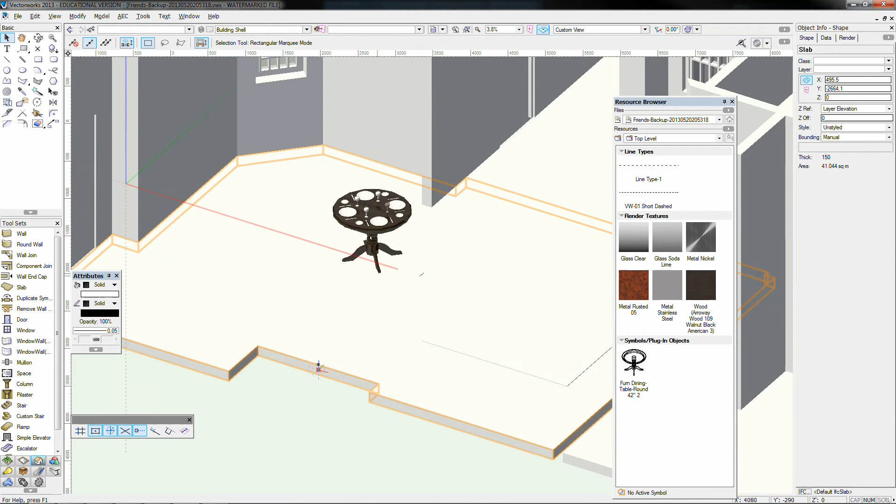It's going to have a little think about that, going to have a little bit of rendering time because I've got that there. I might actually just turn off temporarily our furniture layer so we can just focus on the slab here.

So how do we make a texture that involves an image? Well, firstly, right click in here and go New Resource in your current document, Renderworks Texture. From the color drop down, you want to choose Image. I'm going to import an image from File, seeing as I don't have one used at the moment in another resource.

It's going to take me to my current file, which I've got open here, which has most of my images that I've used so far, and I'm going to choose this vinyl flooring. It's a horrible flooring, but it's actually pretty close to what I've seen in the Friends set images and all the other things I've done so far.

That looks pretty good from what I can see. There's no filtering on that. We are going to tile this horizontally and vertically. No flipping required, but you can rotate and invert as well. Clicking OK gives us an example there.

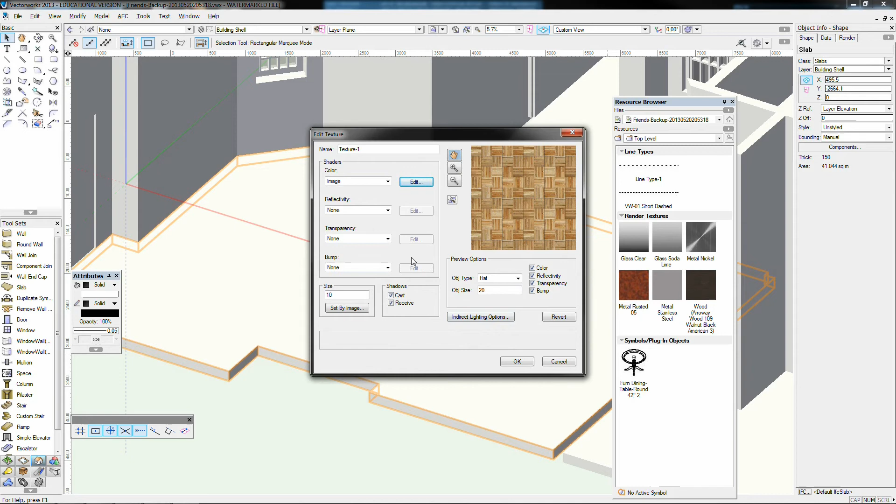Now what you can see is it's got quite a thick black line around the outside there. That's probably due to how my image is currently laid out, but I think it's going to be okay for the moment. There's no other editorial options I want to change here. We could put a blur over the top, but I'm actually just going to see how it looks for the time being.

You can see here we've got texture 1. I should probably rename that. I might do that to floor texture 1. There we go, it's jumped up to the top, and I'm just going to simply drag that straight onto our floor here, and we'll see what happens.

Now already I can tell you that's far too small. We could edit that in the render tab here, but I don't think we want to. We want to actually edit it here in the componentry size. I'm going to increase that to 100 and see what happens.

Okay, it's closer, but it's nowhere near close enough. We're going to have to really amp this texture up, and this is the important reason that you want to make sure you have high quality images. Normally if I use a Google search or something like that to find these images, I'll make sure I check the large box in my search criteria so that I get a high quality image.

Now surprisingly, that's actually really close to what I want to do. The sizing is pretty much perfect, I think. And that was quite straightforward to do.

The flooring texture, as I said, because we're on a slab, we don't seem to get as many options as I thought we might. You can change the part to top overall, and no, that doesn't even give it to you there. So it's simply texture application, it seems, for slabs, which I hadn't used for this before. That's fine though, as long as you get your texture sizing right in the texture options here, you're pretty much set. So that was pretty straightforward.

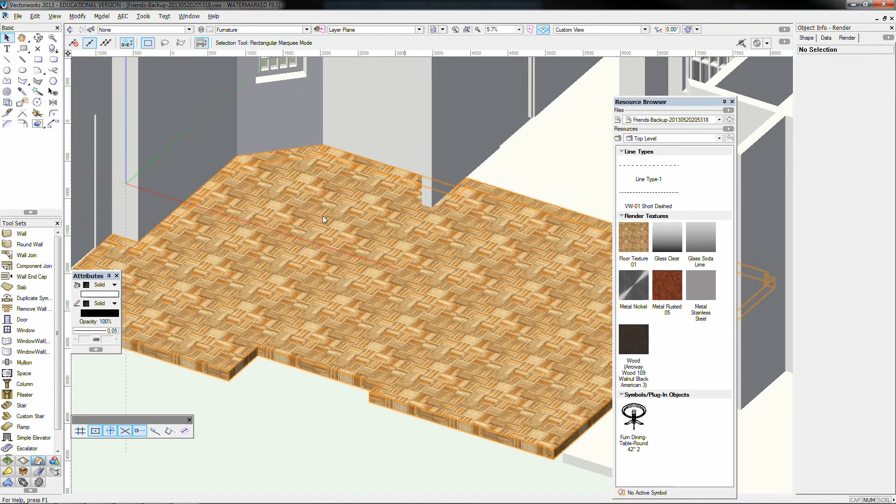Let's have a look at some other options when I go to do my rug here. So swapping over here to the furniture, it'll try and render this in as well, I suspect. There we go, and we're focusing on this rug here.

So I'm going to left click on the rug, grab it like that, and I'm going to once again create a texture. Right click in here, New Resource, Renderworks Texture. Dropping down again, we choose Image from here.

I'm going to import yet another image, and this is a rug similar, not quite the same though, as Monica's rug that she has there. Hers has flowers on it, and I couldn't find one like that. What I do want to do though is not have this image tile, just purely for me to line this up. So there it is there.

The sizing of this is going to have to be quite large. Once again, 1000 I would think is going to be close, but mightn't actually be big enough. Drag and drop that texture straight onto there, and we'll see what happens. There's the rug image. So what do I need to do first?

I can already see that I need to rotate that 90 degrees to have it align. The second thing I'm going to do is scale this up. Now the scale factor is normally limited in here. It normally goes down to 0 and it'll tolerate up to about, I think, 30 or 40% an increase of what you've got already.

So I don't think my scale bar here might just make it into position. You also notice the horizontal and vertical offsets here. I'm going to have a play with these numbers, and I really wish they were on sliders. Maybe that's a future incorporation of Vectorworks. Normally what I'll do is first drop that to 0 and 0 and see how that looks from that point. Okay, it's off shot there, so I'm going to bring that back to -2000.

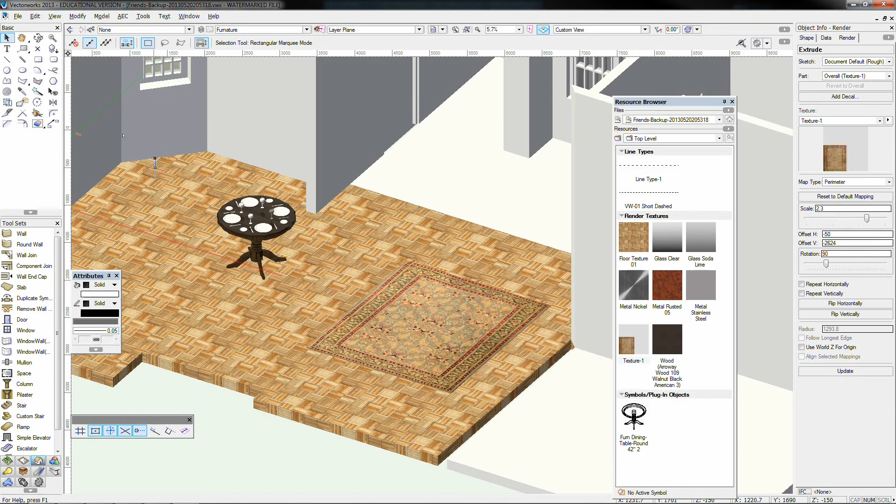See, I'm already quite close here. Minus 50, I'm just going to play with these numbers, I'll be right back. So this is two minutes down the line here, I've just had to play with this. You can use the attribute and mapping tool up there, but I like to do it this way, I just feel more confident about it. So we'll just have a look at that.

Overall it looks pretty good. I have got a white edge there, which I might have to eliminate purely because we're just mapping this onto the top. We might set the base color for this to be that light cream color there, which will hopefully eliminate that.

Good, so that's our rug there. You can see that I just mapped that in with numbers. It doesn't look too bad, I think, and if you were to put that inside a set design or something like that, it wouldn't be too bad. That grey line there I could probably get rid of just by scaling that up another couple of points. It was included in the image that I just took, but I'd be pretty happy with that result if you showed it to me.

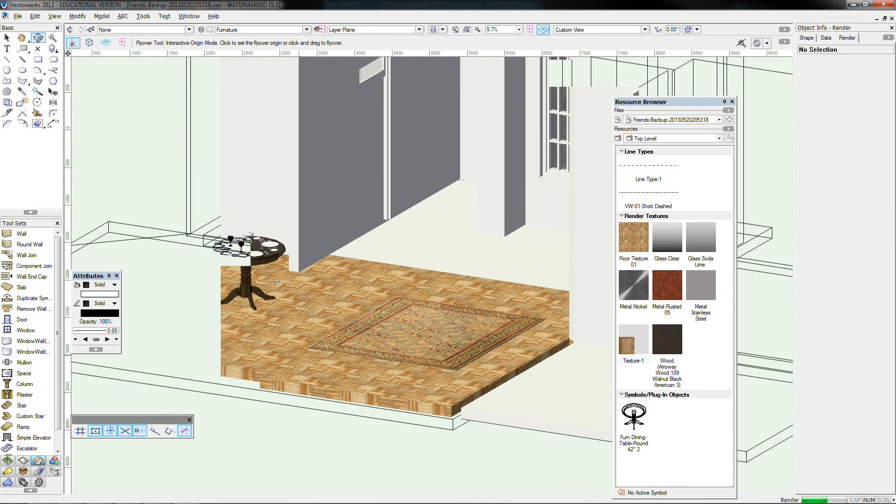Let's just focus on one more thing that I've got over here, which is currently hiding, but I've got a picture frame hiding there, and I'm going to try and put the Friends image on there as a decal. So let's have a go at that.

For this purpose I'm just going to jump inside this group here. Have I got both those extrudes there? Okay, we'll start off with this one. This one I'm just going to colour purple because that's the colour I've seen most of her walls. Where's a nice dark purple? It's not quite exact, but it'll do.

Render that out for me, Vectorworks. You're hiding behind that wall. Excellent, okay, so there we go.

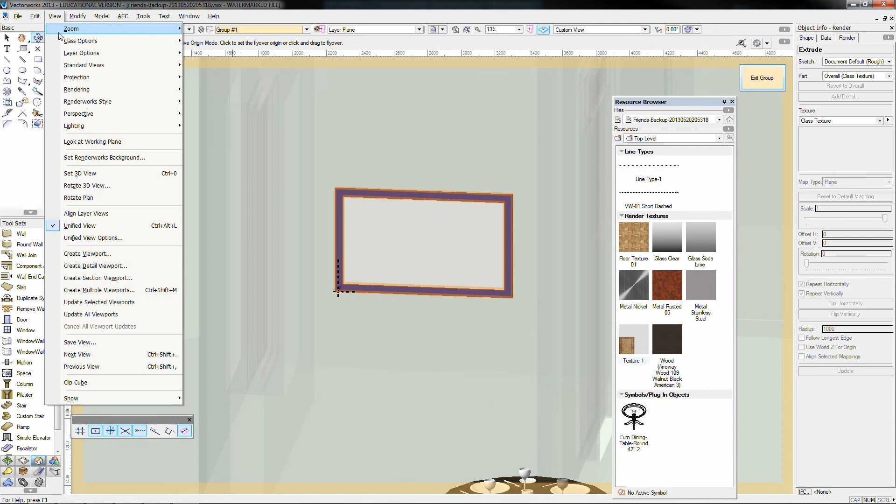I'm also going to choose from my layer options up here to grey others, which means hopefully they won't get rendered, they do in a transparent form. We will choose not to have any layers behind us, just the active layer. And when you're inside a group, this is a handy thing to know, you can see it's rendering the table because I turned off all the background layers there, it's the same as if I had gone up and turned them off. There are group dependent things, but I'm not quite sure where I would access them.

I'm also just going to try and grab inside here our interior picture box. First thing I'm going to do is import the image I'd like to put in here, so I'm going to go new resource. This time I'm going to do it as an image just to test this feature out. I'm trying to find this image that I've just found on the internet, which is a lovely photo of the Friends guys there. Import as a JPEG, that seems pretty good.

Now I'm going to try and show off decals. To do this I need to find a part of this. Now you can apply decals to the top, the bottom or the sides of an object. Because of the way I drew this object, it's actually the bottom that is currently facing us, just because I flipped it up after creating it, but that's okay.

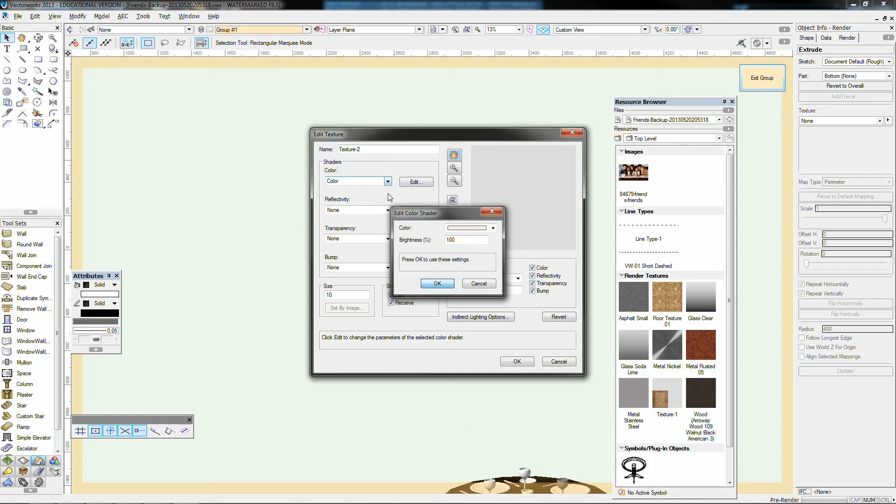Under the textures panel you need to choose a base texture. Now I just want something really simple, so I'm actually just going to make a new texture in here really quickly, a Renderworks texture that just has a colour attribute. We'll make it a nice light cream, just in case we overshoot or miss something. Actually, let's make it black, that's an even better idea. There we go, black, and we're just going to call this black temp.

And I'm going to apply that to the bottom, so drop this down here, find our black temp in here, there we go, and that should fill that in black. Excellent, now I can click this Add Decal button. Do I want to change the texture mapping type? Now it's currently on perimeter, which is not editable with the mapping tool, and that's the tool I want to use to do this, so we've got to change the mapping type to be edited with that.

Now we can reuse an existing image. That's why I've imported this image here, and I will choose the Friends background image. Hit OK. We can choose the sizing for this - I'm not sure about the exact sizing, so we're just going to have to go with it really.

Once we've got to this step, it's important to grab this tool here - the Attribute Mapping tool. You'll notice in the first episode I jumped over this because I said we'd discuss it now. Clicking on this gives us this boundary of our X, Y, and Z axes, telling us to map this image. My hand turns into like a pointing hand, almost like pointing at a plasma screen.

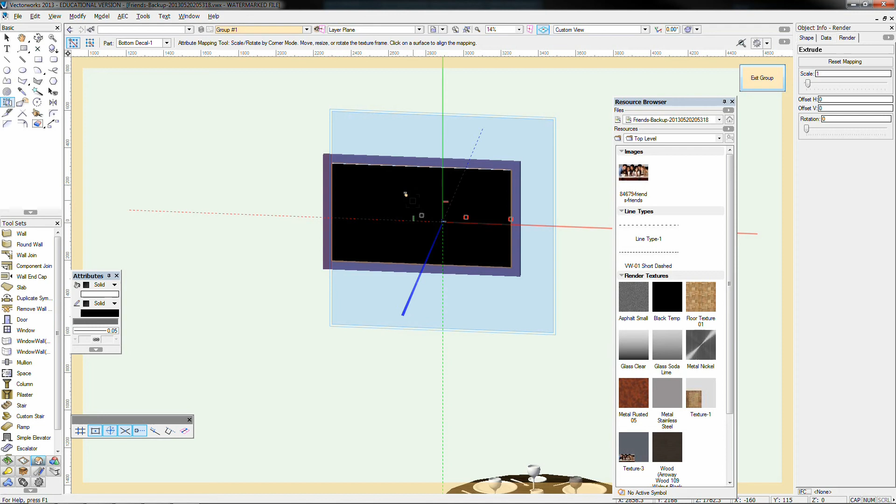You just want to left click on the surface here, and the moment you've done that, it will realign that image to this surface, to the face we're currently looking at. You'll also see, if I zoom in, our little tiny Friends image - our scale was slightly out, but we can grab the corners and scale it upon this surface.

I'm going to grab this corner, hold down Shift so I maintain scale, and drag that right out there. I'm going to keep zooming out, and my computer is kind of like, what are you doing, stop breaking me. But I'm going to grab this corner and keep scaling this up. You can see the scaling boundaries increasing.

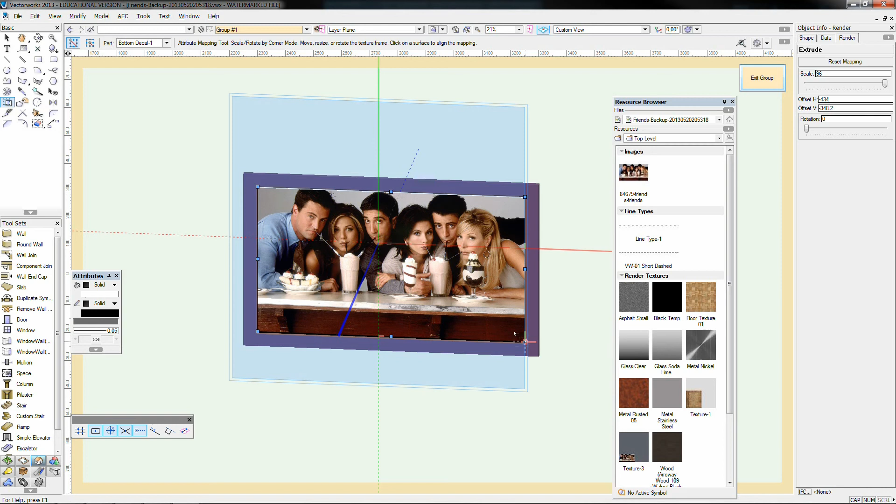I'm going to grab the image, probably pop it up into this top left hand corner here, like so. Grab this bottom left hand corner, and because I purposely made this photo frame to fit the image size, I got the proportions correctly - I know that's going to fit in there nicely. I'm quite happy with that, so I'm going to click Exit Group.

There's our image still maintained there, and if we zoom right back out here, there it is inside our venue, the area we're working in. I've just got to turn the building shell back on again through the layer options, show snap others - that's my normal default - and there it is.

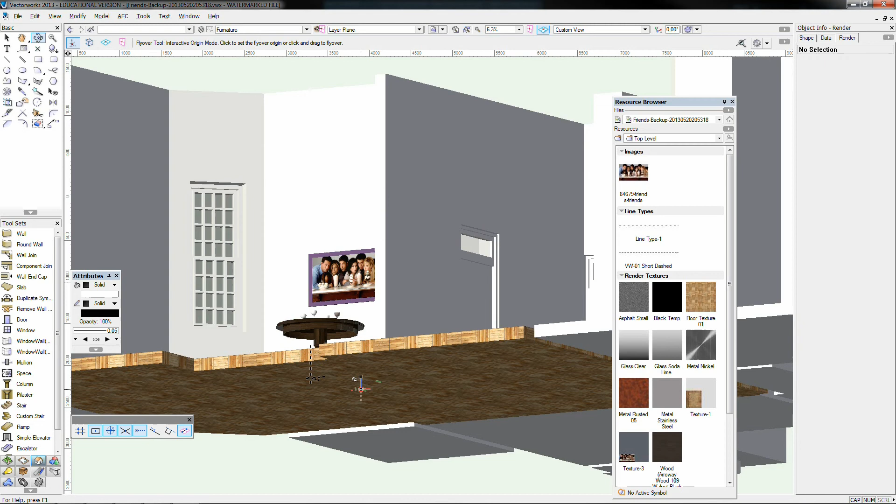Look at our little photo just hanging in the back there. If I come over here, you can see it will change perspective, and even if I go down somewhere down here, it just maintains that perspective because it's mapped to that particular surface.

So there you go - does everyone feel like they understand textures now? I certainly have had a play and a little bit of an experience. The mapping tool is something I very rarely use - as I said, I normally stick to the maths - but using it just then, it was quite friendly and easy, so I'm very happy with how that's working out.

This is just a little thing I've just realised now - you can see our carpet and flooring, and in the reflectivity that these windows have by default, you can actually see just barely through there our other reflectivity stuff. That's really handy, I didn't even know that happened. So I'm learning things all the time.

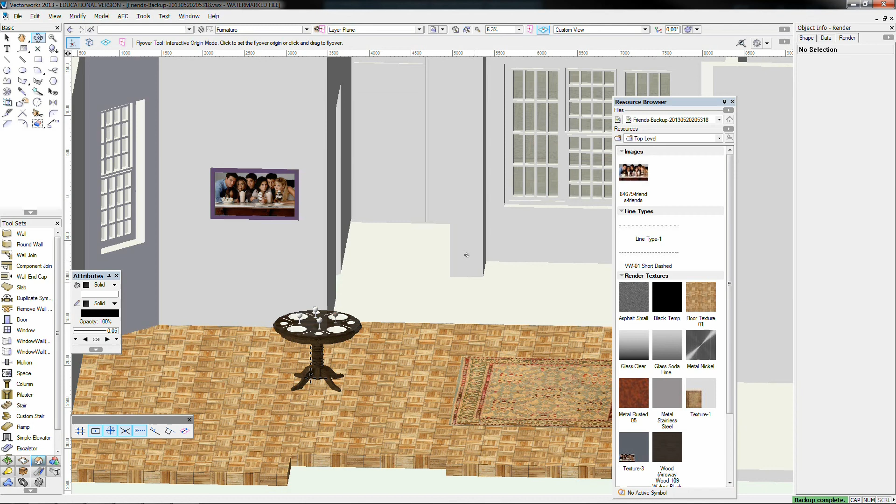Do I want to back this up? Yes, I do. Okay, so I'm going to go ahead, just do a couple more little things here, and then I'm going to put an image prop in right at the end, and I think that'll wrap us up. We'll come in at like an hour and a half for this episode. So I'll see you in a second.

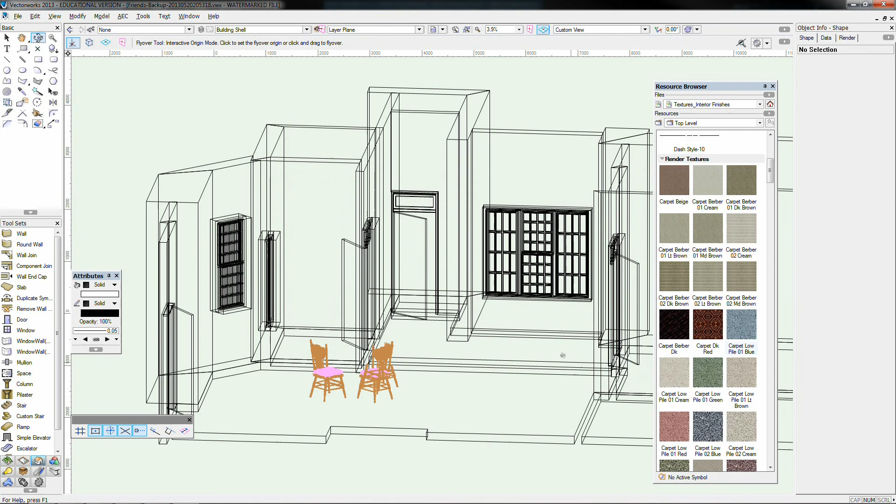Well, that's about as far as I'm going to go with my house so far today, or I should say Monica's apartment. Just quickly to give you a teaser trailer for what might be coming up in our next series of classes when we get around to it, there are some very interesting features we haven't yet looked at in Vectorworks. So make sure you do stay tuned.